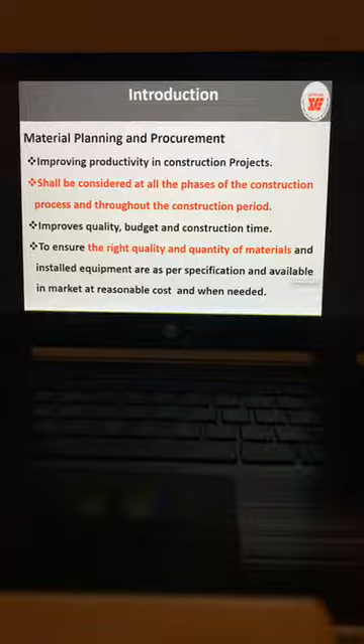Choosing the right material, right brand will help enhance quality and maintain the budget and construction time, and ensure the right quality and quantity of materials and installed equipment are as per specification and are available in the market at reasonable cost and when needed. Most of the time we keep getting requests from contractors that a particular material brand specified in the contract is not available.

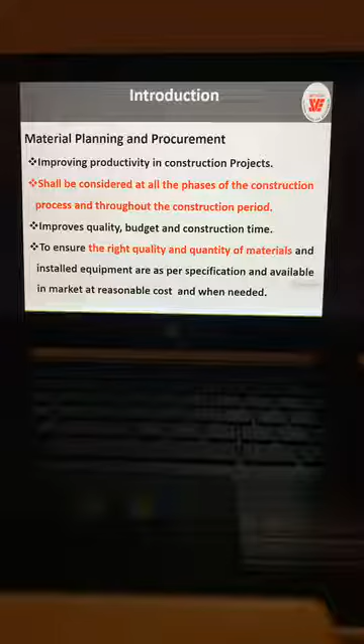So the process now, we are going to the next topic, that is the material planning and procurement process, starting from planning. What is the planning of material? Like when we do the drawing itself, they'll give the specifications for the material, and then we have to do the quantity survey.

Identification of the materials' availability, procuring those materials and storing at the site, receiving and distribution at the site from the stores. So we issue the materials for construction. This is the process.

Material planning and procurement is to have the right quality of material, right quantity - what is the amount of material required - and at what time you require each material. We have to plan.

So it's very important, time. That means suppose we were planning for one of the clients that he wanted the facility to be ready by end May, suppose, or end June.

So what is the delivery period for finishing transformer, what is the delivery period for generator, what is the delivery period for elevators, what is the delivery period for air conditioning chillers.

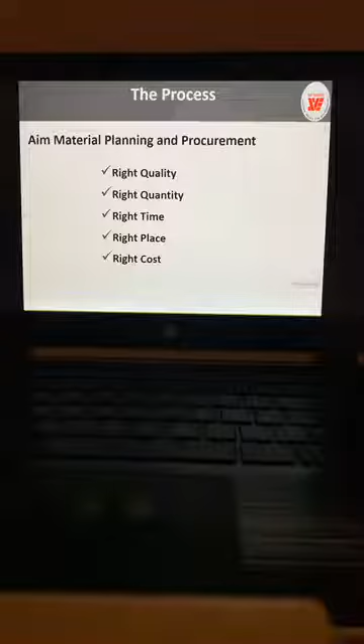And at right cost. So this is the objective of material planning and procurement: quality, quantity, time, place, cost.

Next is the objectives and functions of material management. So we have to manage these materials - procurement, cost and time. Efficient material planning, buying or making. Suppose sometimes bricks, let us say, we make at the site.

Concrete we make at the site, or you may procure by ready mix concrete. Which is better? Procuring and receiving, placing order and receiving time, storing and inventory control, and supply and distribution of materials.

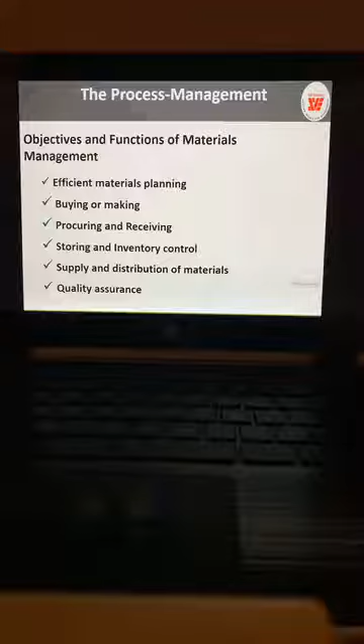And quality assurance. This is the most important process.

Next is the process of material management. It starts from material planning, purchase, stores, inventory, receiving and inspection - that is MIR, material inspection reports - and value analysis.

And standardize and variety reduction. That means we should try to minimize the number of items at the site, that is inventory management. Materials handling and traffic variety - that means how do you take the material to the site.

And then the disposal of scrap and surplus, or material preservation for any future requirements. So these are the points that the material process, procurement process will follow.

Next is the material planning. The estimation, that means the quantity survey. Nowadays it has become much easier with the technology.

Like if you use Revit, you will get all the material quantities required. And then once you have the quantities, once you identify the vendor, you go through the vendor procurement process. Then you have to go for ordering, and then scheduling of the material.

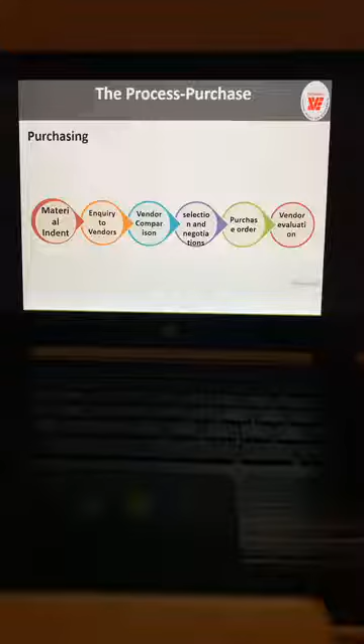Inventory control department decides about the type of ordering system. That means when to order, what payment terms you should have, fixing the safety stock limits - that is also inventory responsibility. How much stores capacity you have, and what is the consumption at the site, and how we'll use it.

And fixing up the reorder level. That means at what period - cement, suppose you want to order every day 50 tons, every day 100 tons. What is the requirement, and what is the storage capacity you have, and then fixing up the maximum minimum stock level.

At the site, the minimum required is at least 2-3 days consumption. So you have the material consumption depending on the Microsoft Project schedule that we prepare, or Primavera project schedule we prepare, and we have the material requirement plan.

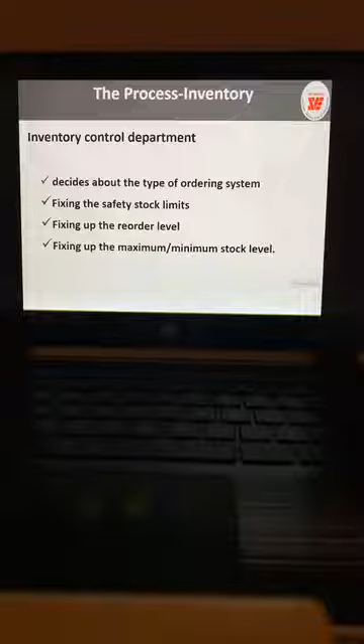And based on that material requirement plan, based on the availability of the material, based on the delivery time of the material, we should plan the ordering process. Next, receiving, inspection and dispatching.

This is basically the received materials when delivered by the supplier. We have to check the quantity, whether the quantity ordered has arrived or not. Sometimes for steel we go by weigh bridge and do reconciliation by taking the number of bundles and length of each bar.

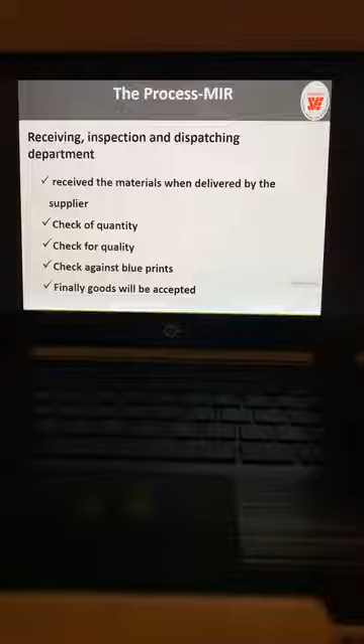We do random checks, check the unit weight of steel, and reconcile with the weigh bridge weight. This is very important, considering the rolling margins also. We check for quality testing and check against blueprints, that is the procurement plan given, and finally goods are accepted. This is the MIR, material inspection and receipt.

Then value analysis and standardization. To reduce the material cost, we have to do value analysis, and optimize the material cost by verifying with other vendors. In fact, I'll give you one example.

I asked my team to freeze the rate, because every day there is variation in cost. So they froze the rate of sand, for example fine aggregate, at a certain price and kept paying the same price. The vendor is happy because he is getting that rate. When I checked with another colleague, they were procuring at a much lower price. I asked my team why, and they said they were following my instruction to fix the price. So fixing the price is important, but at the same time we should not keep paying a higher price. It's very important to manage procurement well.

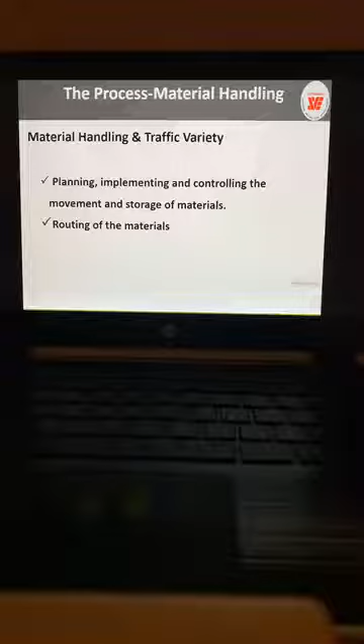Next is material handling and traffic management: planning, implementing and controlling the movement and storage of materials, and routing of materials. That means where we locate the stores and how we shift material from the stores to the activity site. This is also very important, along with disposal of scrap, surplus, and material preservation.

Then problems of material management. What are the issues we face? Organization structure and procurement problems, storage space, security problems, pilferage. This is the biggest thing. I have yet to see any project without pilferage of materials at the site. Even with the best of contractors, we see pilferage happening from the stores.

So this is the biggest challenge in material procurement, along with availability of materials in the market. We should keep checking materials availability in the market due to demand and supply, and due to other projects also.

I am seeing clearly on my phone. I am really worried why people are not able to get video, maybe because of a network issue. Can anybody confirm if you are getting good quality video, that when I present my screen you are able to see? Some people are complaining the video is poor. That means some people are not getting good signal. Video is the second priority in any network, so if you're not getting good video, you have a network problem; many people are getting video clarity fine. So please don't keep writing that. Check your network signal, please. I am getting disturbed because if somebody says he's not getting it, I think probably it is my fault, but on my phone I am able to see clearly. Thank you, Mandlik Garu.

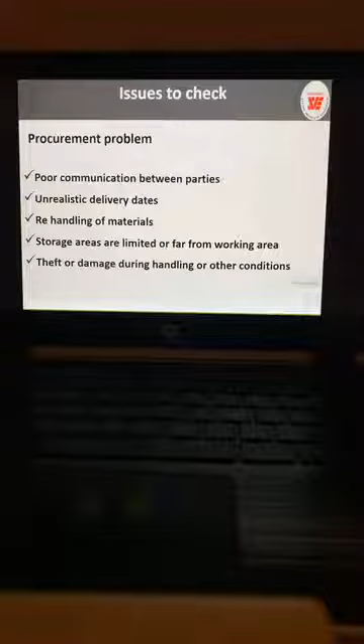Rehandling of materials is a big problem - storage areas are limited or far from the working area, leading to theft or damage during handling. So the handling method has to be managed properly, and we have to design the handling method also for the material.

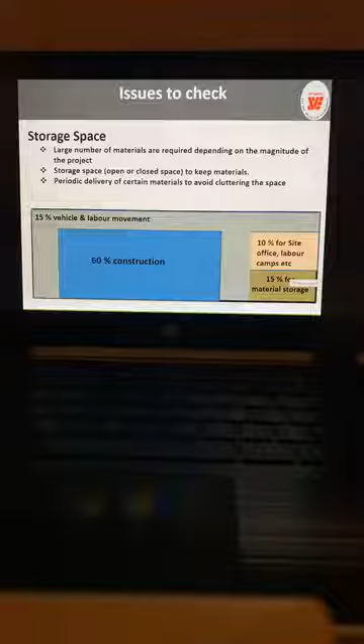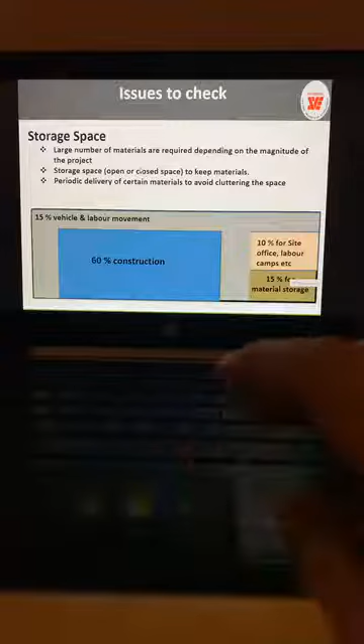So this is a typical site. In any site, normally you will have 60% construction space. We have to plan the site office and labor camps, and then plan the storage of materials. The storage space required depends on the large number of materials and the magnitude of the project, and the storage space is needed to keep material for periodic delivery.

Security problem: loss of material through pilferage and theft is a loss to the project as a whole. Security of materials on site is particularly important for high value items like copper wires - mainly theft happens for copper wire. So you have to keep RFID properly for the materials so that you don't lose them.

Now let us look at the materials we use at the site. For fine aggregate, we have fine sand, coarse sand, and stone crushed sand. These are the types of sand. We should be able to decide which type of sand we use for the project for each application.

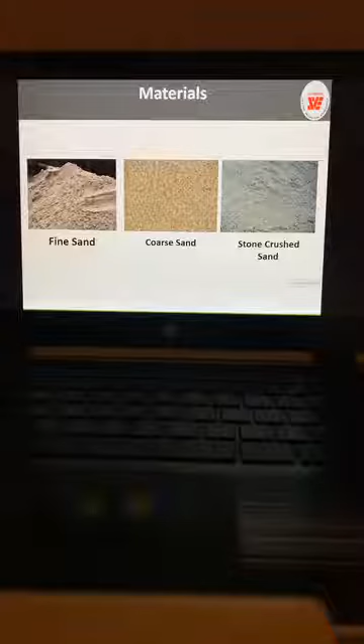Then for coarse aggregates like 40 mm aggregate, hand crushed stone or machine crushed stone, and then 20 mm machine crushed stone, and then 10 mm or 12 mm downgraded aggregate.

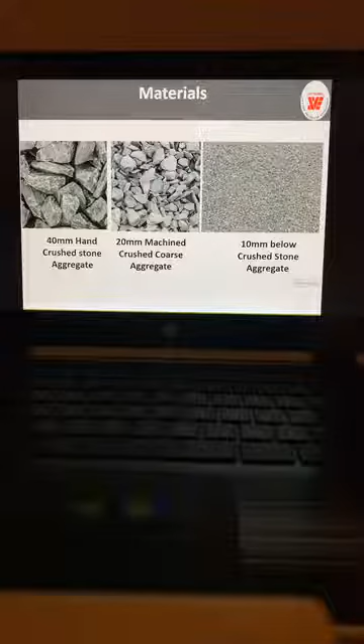Next is blocks or bricks. We have burnt clay bricks, Fal-G bricks, Porotherm bricks, cement concrete blocks, AAC blocks, and laterite blocks - mostly used in Bidar in Karnataka - and hollow cement blocks. So these are the different types of blocks, and we have to decide which block we are going to use for the construction.

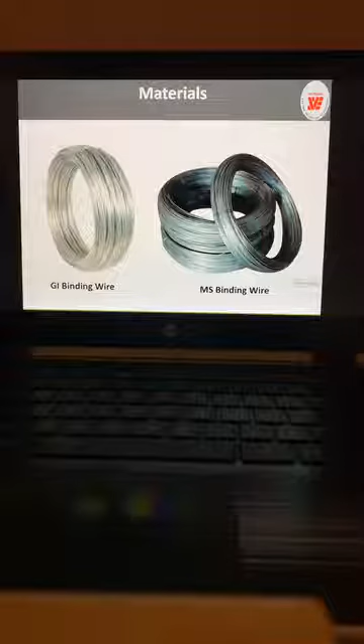And coarse rubble stone, random rubble stone required for RR masonry and CRS masonry, and steel reinforcement - TMT bars or HYSD bars we have to decide. Then binding wire, GI binding wire or MS binding wire. And then cinder for filling sunken slabs or any lightweight filling, we use cinder.

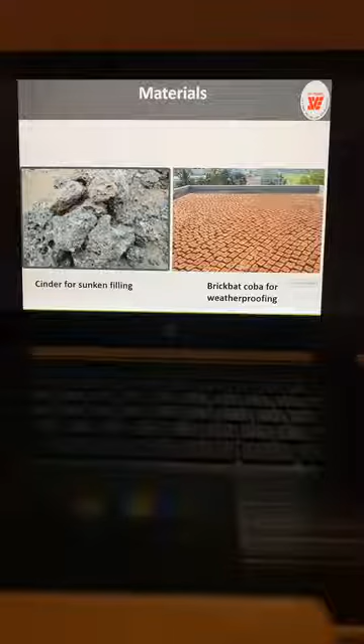And this is brickbat coba, which is brickbat used for weatherproofing, as we have been discussing. Then doors - we have teakwood panel doors, masonite panel doors, and flush doors. You can see the side frame, and we have the radiata pine fillings, meaning we use this filling material.

These are called sectional doors, and then we have core veneer and fine face veneer for the final finish in the flush door - it can be veneer, Decolam, or normal ply. And then we have PVC doors which we use for toilets and such.

And windows - we have mild steel windows, aluminum windows, aluminum anodized powder coated. People think that aluminum doesn't corrode, but we have to specify anodizing of aluminum and use powder coating. Powder coating provides protection - anodizing alone will not give you protection to the windows. So we have to have powder coated, anodized aluminum windows.

And we have UPVC - I'm not mentioning all types, just the mostly used ones. We also use wooden paneled windows, wooden glazed windows - openable, sliding, sliding with mesh, sliding with 3 tracks, sliding with 2.5 tracks. Like that, we have to specify the windows.

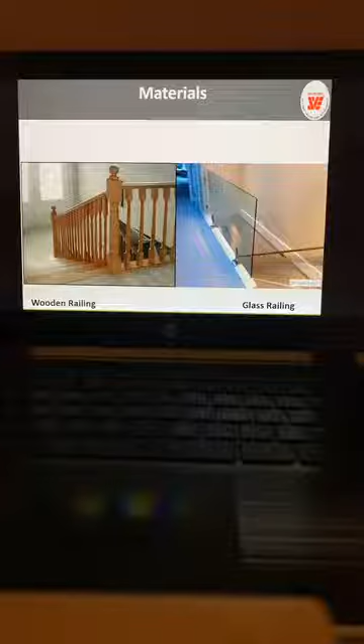Next is flooring tiles - vitrified tiles, non-skid ceramic tiles for bathrooms and flooring, and glazed ceramic tiles. I am showing some examples of these materials.

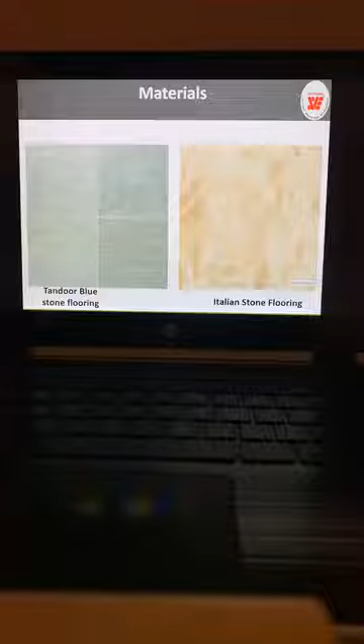And we have Tandoor blue stone. In fact, Tandoor blue stone and Bethamcherla are better than marble in terms of acid alkali resistance. So we should use them depending on the requirement, like for kitchens or bathrooms. We should not use marble there because of its highly acidic and alkaline nature exposure.

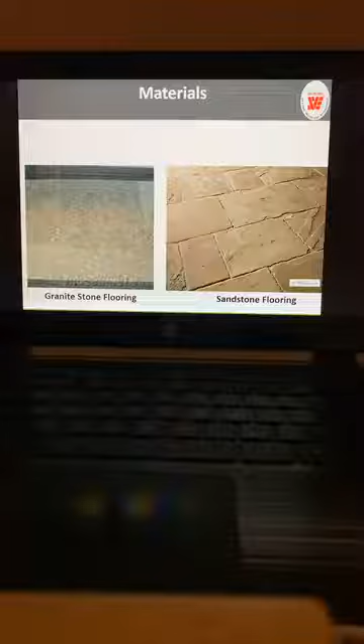And then we have Italian marble flooring, granite stone flooring, granite reconstituted like contra - so many types of materials - and sandstone flooring.

If you take flooring alone, there can be 100 different varieties. So we have to decide, and sandstone means Kota kind of materials. And then we have these lever locks for the doors.

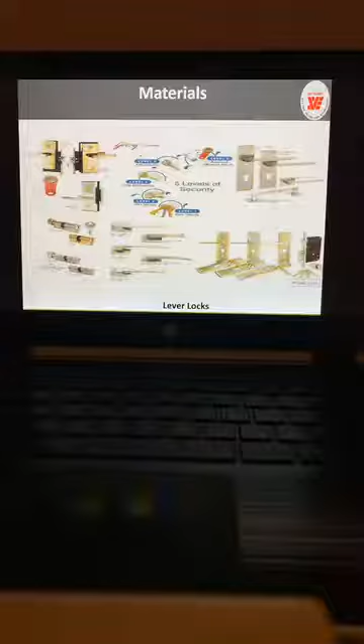I have estimated once for one door, the specification goes into door fixtures, 20 items will go. Like we have the locks, we have the aldrops, we have the handles, all that we have to specify in our specification for the doors.

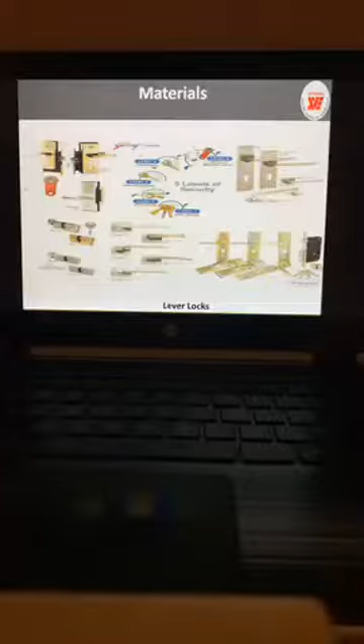Next is the door hardware, that means hinges, how many hinges we have to use and what type of material for the hinge. Is it stainless steel? Is it aluminum? Is it brass? Like that. We have to specify the material for each one of this.

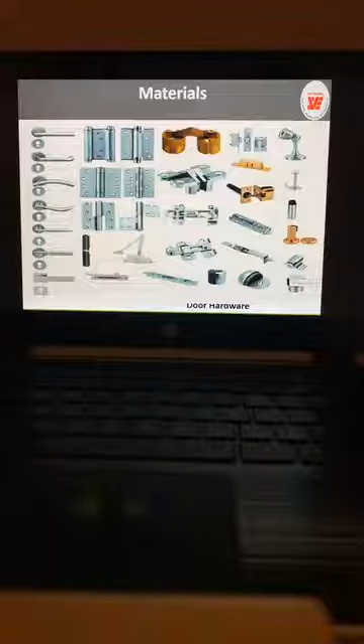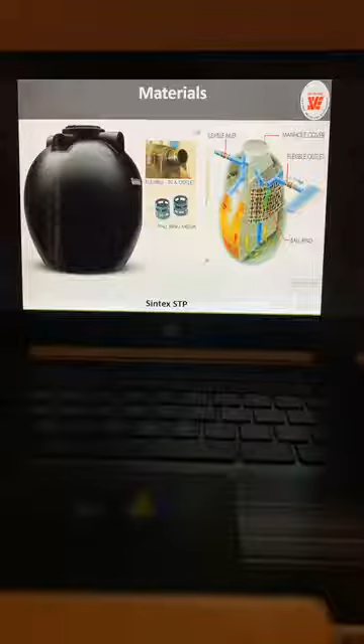Next is the storage tanks. We have the overhead tanks, we have the underground tanks nowadays, we have manholes also nowadays which are available in Sintex. And we have these STP, sewage treatment plants or septic tanks kind of things we can use, readily available material.

And next is the construction chemicals, also the materials. What are all the types of chemicals we use? In one project, construction chemical budget was alone 60 lakhs. That means today's cost, it is almost like 3 crores today. In one project, which is costing about 20 crores, 3 crores we spent on chemicals. So this is the kind of costing.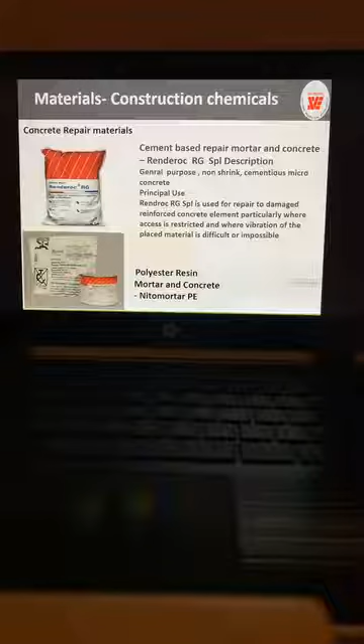So we use cement repair materials like repair mortars and micro concrete and a non-shrink cementitious micro concrete also we use, and we use concrete repair materials, cement-based repair mortar and cement-based repair mortars.

We use the concrete admixtures for plasticizers, admixture for retarder, and so for the concrete and plasticizing materials. And nowadays we are using for self-compacting or flow mix of the concrete. And the concrete adhesives, that is bonding agents with the concrete, and so many types of bonding agents are available. We should be aware of this.

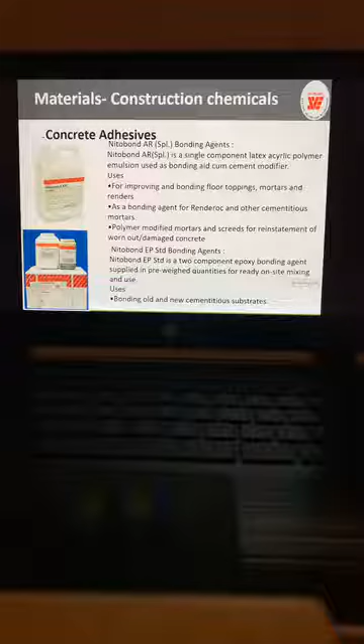I'm sorry if I'm using specific product names, because I'm used to them. I've written those things. And sealants, polysulfide sealants for expansion joint.

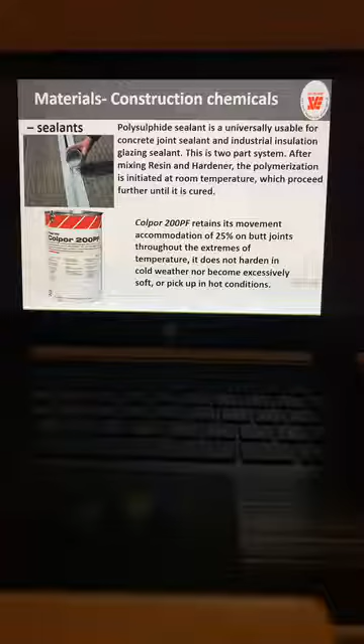For polysulfide sealant, it's very important to maintain the alignment and the gap, uniform gap between the edges. So this is very important to prepare the alignment perfectly. Then only you use the sealant, because sealant, or any polymer, is very sensitive to dimensional tolerance actually. So we have to be very careful in specifying application of the sealant.

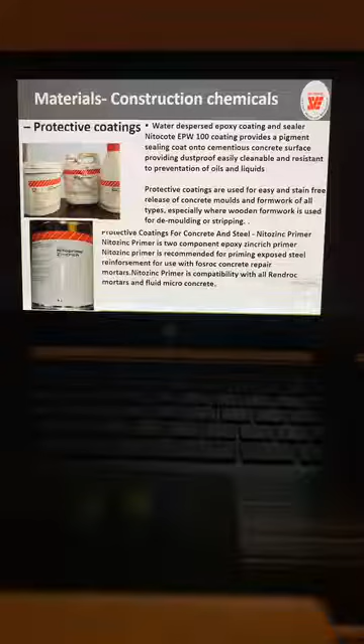Next is the protective coatings. This we have been discussing for corrosion, anti-corrosion, and concrete also when it is exposed to corrosive weathers. And then waterproofing materials, which type of waterproofing we use. Yesterday we talked in detail.

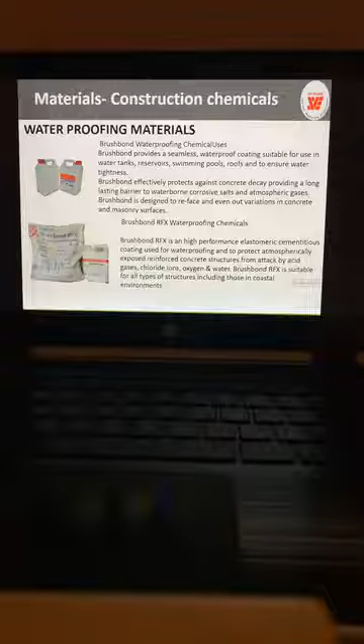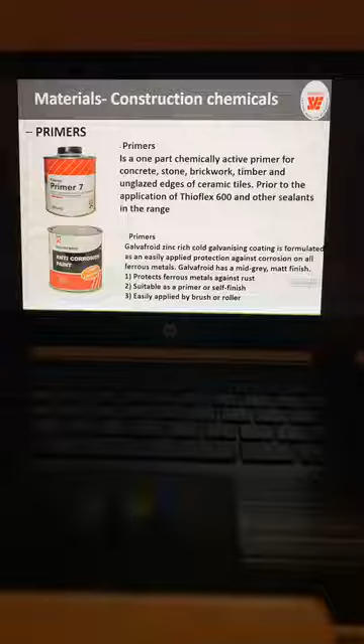And then is the water stoppers. We talked yesterday also, again, water stoppers. And then primers used for anti-corrosion, Galvafroid, zinc-rich cold galvanizing coating is used whenever we do the welding for galvanized materials. And chemically active primers for concrete, stone, brickwork, timber, and unglazed edges of ceramic tiles. All that we can use these primers.

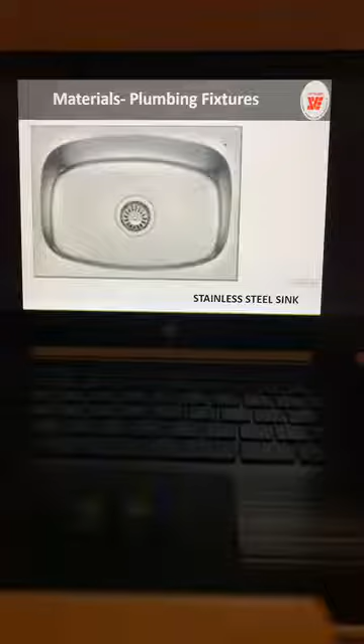And then pipe fittings. This is one of the most ignored subjects. I have come across tenders that specify the number of bends and fittings, because the drawing should go to that level. If you use Revit software, you'll get the number of bends, reducers, couplers, flanges, thread caps, male T-joints, male elbows, female loose joints, male T-joints, all types of materials required.

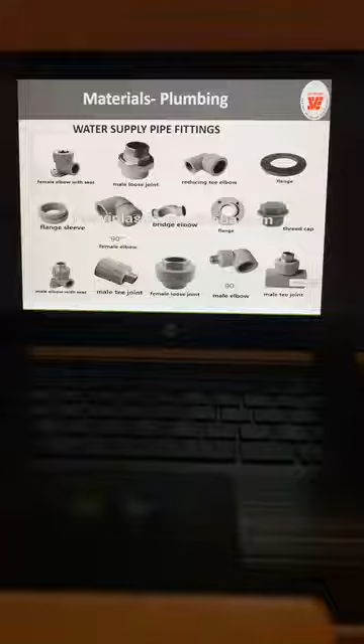We should be aware of what all we have to use in plumbing, because plumbing is mostly done by civil engineers also.

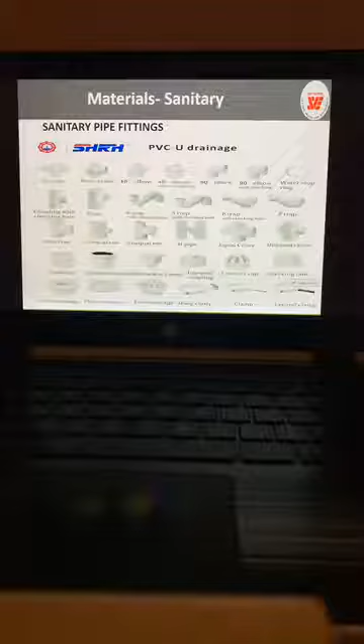And water supply fittings - couplings, female T, and different plumbing materials. Then we have sanitary pipe fittings. We use PVC or sanitary stoneware pipes, SWG pipes nowadays. And the things like couplings, equalities, unequalities, H pipes, expansion joints, rainwater funnels, unequal couplings, checking holes, clamps and expand clamps.

Valves are another thing. We have to control the water supply at certain points, so we use valves - butterfly valves, globe valves, gate valves, check valves, so many types of valves, mainly control valves. And nowadays we have automatic metering systems, Wi-Fi connected metering systems.

Next is electrical materials. You may think, what do civil engineers have to do with electrical and plumbing? Because we are the people who do the costing, and we are the people who monitor installation of all these things. So we should know the terminology, the material, and where to use which material.

This is very important. We have switchboards, mosaic wiring devices, and other wiring devices, and sockets. We have different types of sockets - telephone sockets, internet sockets, and MCCBs, main control switchboards. Next is switches - different types of switches we have, and relays.

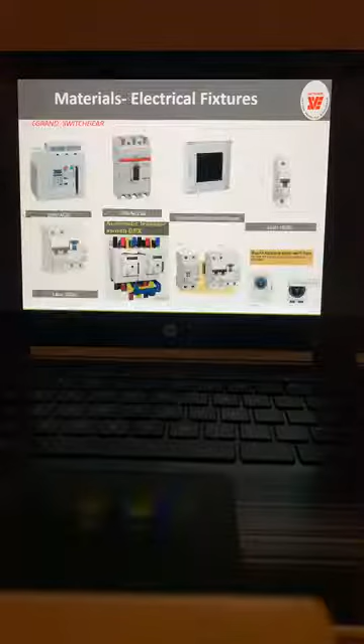And this is another company's switches. Schneider - I can definitely make that statement, I have done a detailed check - Schneider brand switches have better contacts and better relays. And next is Legrand switch gears, and Schneider switch gears, different.

We should know what all we use, where - isolators we should know, phase changers we should know, and we should install them. Some clients say there is no electrical consultant, that the electrical contractor will do the job, but the civil engineer is expected to supervise that. So if you're not aware of these basics, you should insist on basic safety controls in the electrical work.

Next is the UPS that is installed in most works. We should know UPS brands too, and DG sets, and then electrical cables - commercial armored cables, normal cables for residential use, buried armored cables. We should be aware of these things.

Next is light fittings - so many fittings are there. In light fittings itself we have 100, 200 varieties. So which fitting are we going to use? Commercial lighting, office lighting, industrial lighting, hazardous lighting, landscape lighting, area lighting, solar lighting, clean room lighting.

You know what solar lighting is? It's solar tubes - you can get solar tubes directly into the house, and each solar tube costs about 7,500 depending on the length. In daytime you can use solar tubes if you have large areas to cover. In industries also solar lighting is used. Clean room lighting fixtures are different, and roadway lighting is different.

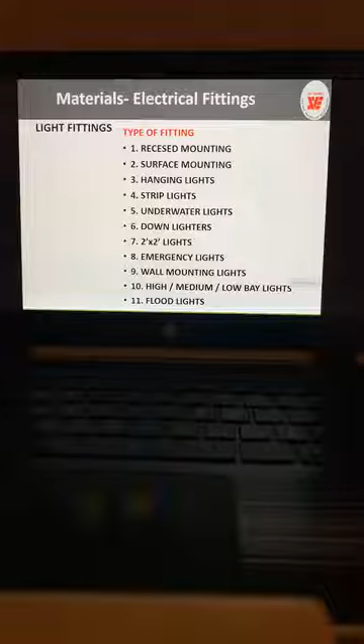Hanging lights, strip lights, underwater lights, downlights. Underwater lights we use mainly in swimming pools, and downlighters, 2 feet by 2 feet lighting fixtures mainly used in offices in false ceilings, emergency lights, wall mounting lights, high, medium, low bay lights, and floodlights. So many types of light fittings are there. Let us see these light fittings and different companies that supply them.

I'll not go into detail, but we should be aware of each light fitting and its terminology, because we have to make estimates correctly and float tenders with the specifications correctly.

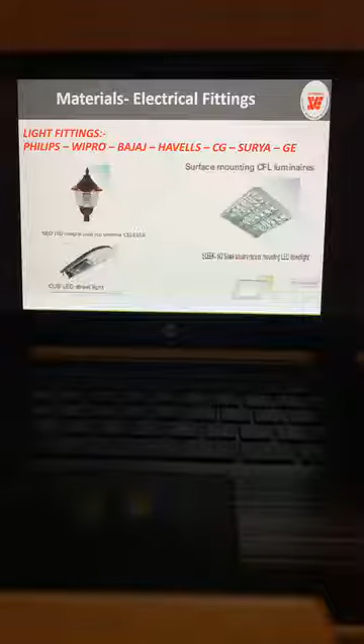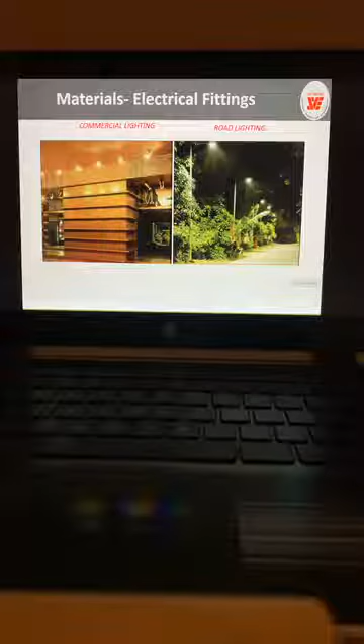Next, light fittings. You can see these different types of light fitting: surface mounting, office lighting, and the types of fixtures we use. Industrial lighting, commercial lighting in hotels and malls, and street lights. These are the different types of lights we use.

Then we have clean room lighting, which means there should not be any dust collection. And industrial strip lighting for uniform lighting, landscape lighting, and shed lighting.

This is designed by the electrical people, but has to be implemented by us project managers or project engineers. So they should have the basic knowledge of all these things.

And switch gears, indoor type, outdoor type, transformers indoor type, outdoor type. We have oil filled transformers, dry type transformers, distribution transformers and power transformers. We should know these, how they look and how we mount them, because I suffered as a young engineer without knowing these things. I used to design. So it's very important for us to know about these items.

Vacuum circuit breakers, compact substations. Substation means we always see the substations that are outdoor. So we have indoor substations also, and we have indoor compact substations also.

And then automation, home automation. Nowadays we have burglar alarms, security and surveillance cameras and all. It's a big thing nowadays, and it is going to be even bigger in the future. So we need complete automation: lighting control, air conditioning control, heating control, all that are available now. We have to know about these automation facilities and systems available.

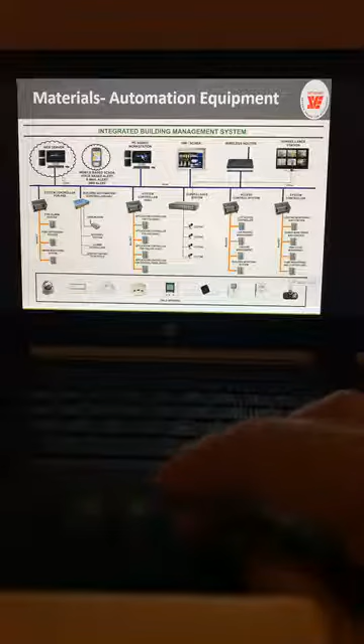Integrated building management system. This is a typical circuit where we have air conditioning control, building automation control, lighting control, access control, surveillance control, and the system controller. All are connected by wireless router and web server, PC based workstations, and SCADA also.

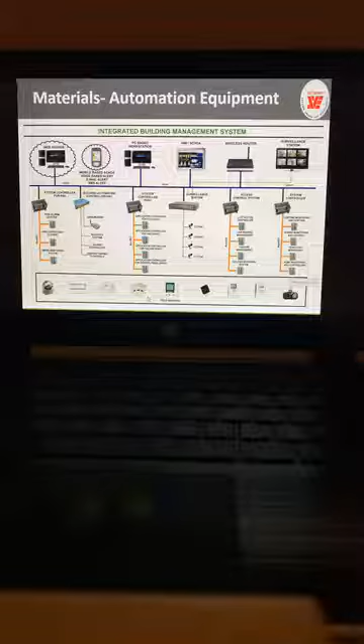So in building automation, even the fire safety, like fire detection, fire alarm, fire sprinklers and all, they are all controlled by automation systems. And we have communication, and we have different solar panels and installation.

And we have the lightning protection for all important buildings. Lightning protection and earthing has to be planned properly. Earthing is an important thing.

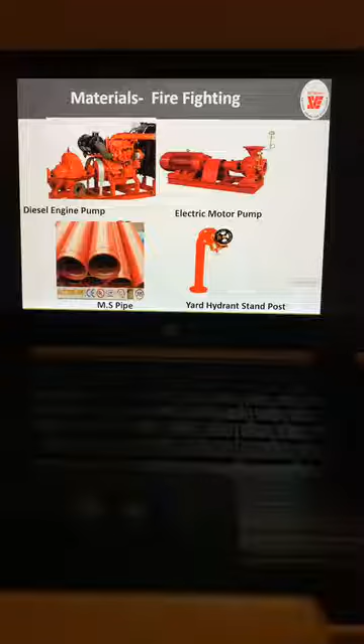And then firefighting. We have the pumps for firefighting. You must know that any firefighting system will have a minimum of 3 pumps: electrical pump, backup pump, and diesel pump or jockey pump. And then we have MS pipes and yard hydrant stand posts.

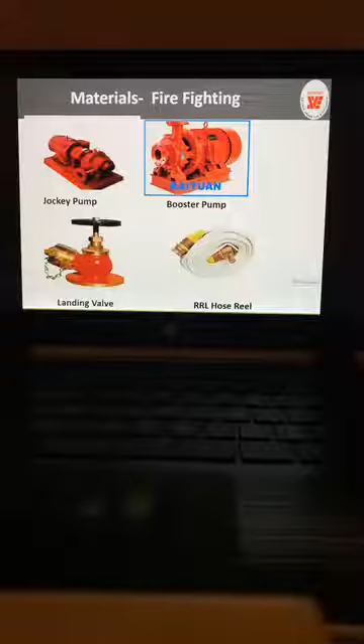This is the jockey pump, and we have the booster pump, and we have the hose reel, and we have landing valves. These are all the items that we use in firefighting. I have also mentioned hydrant valves, fire alarm, hose reel, mask and gloves that are required, and safety shoes. These are all things we have to provide for firefighting.

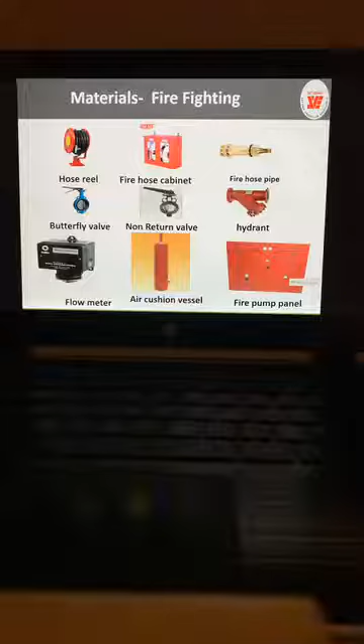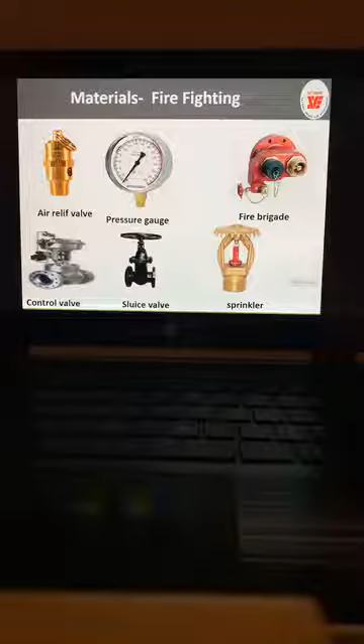Sprinklers and fire buckets, all this. This is a hose reel, fire hose cabinet, fire hose pipe, hydrant pipes, non-return valves, butterfly valves, flow meters, air cushion vessel, and fire pump panel. These are all items we come across. Air relief valve, pressure gauge, fire brigade connection, sprinkler, sluice valve, and control valve.

For fire alarm equipment, we have this alarm and CO detector, shown here. These are the detectors and the infrared system for early fire detection, basically smoke detectors. And we have high resolution CCD digital cameras. This is the fire alarm detector, a simple detector, and then smoke detector, fire detection, infrared thermal imaging, and security cameras.

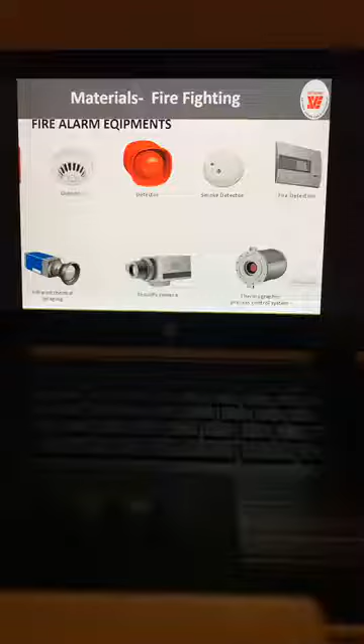Many types are available, and we should specify depending on the need. Of course, the fire consultant will do that, but we should know what all is possible. Then this is the bell, and we have the beacon lights for smoke conditions, loudspeakers, extinguishers, and fire buckets. These are all the items.

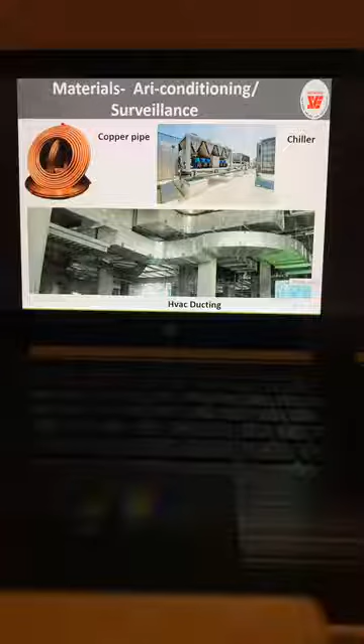Next is air conditioning. We also do implementation of air conditioning and CCTV. So copper pipes, fan coil units, chillers, ducting for air conditioning, AHU fans, HVAC air conditioning grills, and fire pumps.

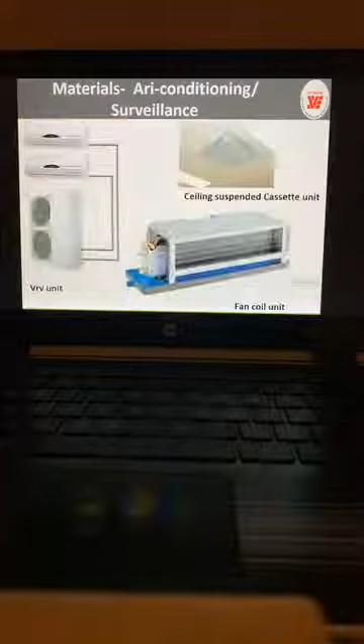A ceiling suspended cassette unit, fan coil units or FCUs, and the VRV units we use nowadays. Air handling units, normally installed on the terrace, chillers, duct insulation material, and dampers.

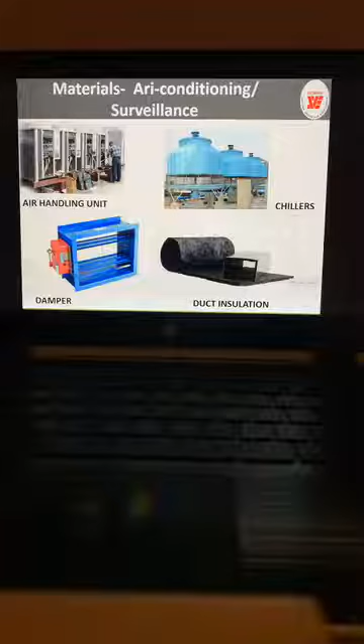The air handling units and air conditioning insulation, different insulation materials for the ducts. The objective of this talk is not the design, but to expose you to different materials, how many types of materials we come across in a construction.

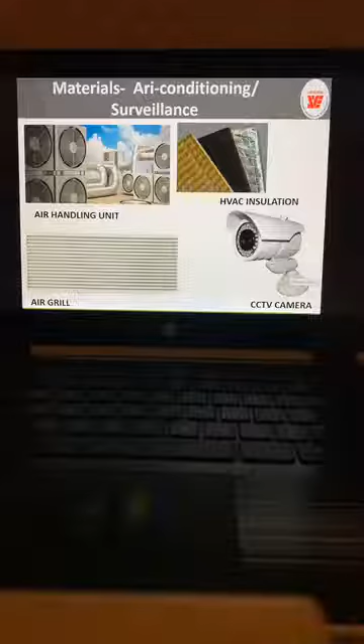My typical estimate is 2,000 items we have to handle in a typical construction site. So I am showing all the items that are required. You will see air grills for the ducts, CCTV cameras, cassette units, and dampers. These dampers dispense the air at the given location, and you can adjust them.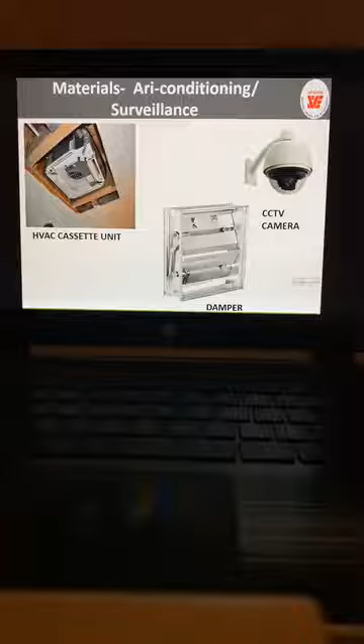Then building services equipment, we have cameras and mechanical fans. We use these mechanical fans in parking areas where we need exhaust or fresh air supply, and also in industries.

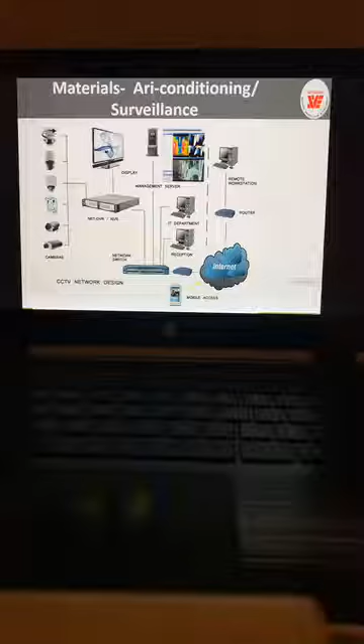Next is surveillance. We have these cameras installed, including zoom cameras. We talked about it, but what are all the items? We have to have the DVR required, and we have these high volume, low speed fans.

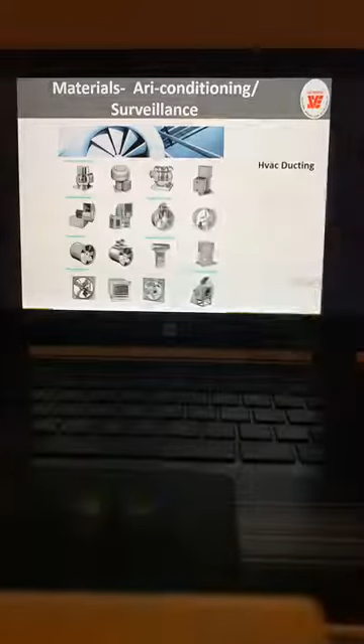We have ducting for HVAC, and we have fans in the ducts also in the HVAC, where the distances are more.

Then mechanical items: we have travelators, elevators, and escalators. Nowadays these escalators and travelators are mostly used in malls. And elevators, of course, are common - capsule type, hydraulic type, and automatic type elevators.

This is the outdoor storage space. Even for fine aggregates, bricks, and blocks, we have to store the material at the site.

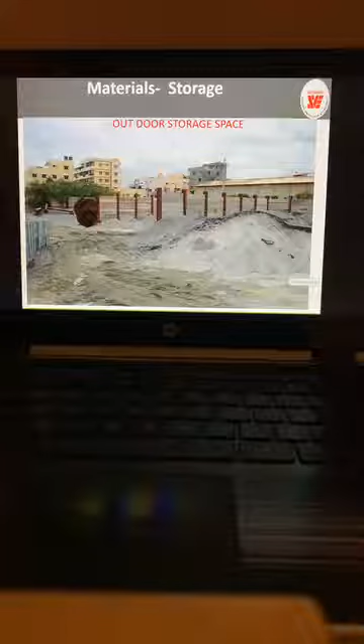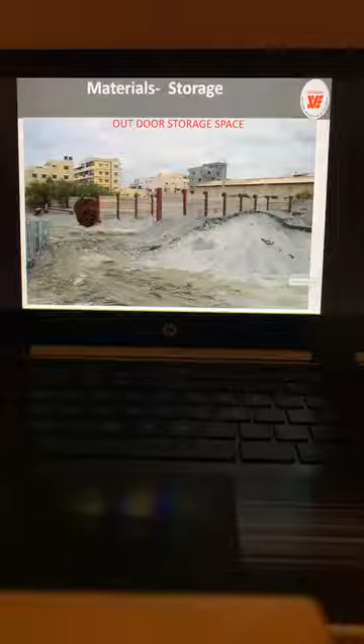Recently, some sand issue was there - the contractor had not collected the sand. In olden days, contractors used to dump the material first at the site for a month's requirement, because sand and aggregates are highly susceptible to price fluctuations. So the better control is to keep the material at the site, whether it is blocks, cement, or steel requirements. We have to plan well ahead and store so that the project timelines are not affected due to risk in procurement of these materials.

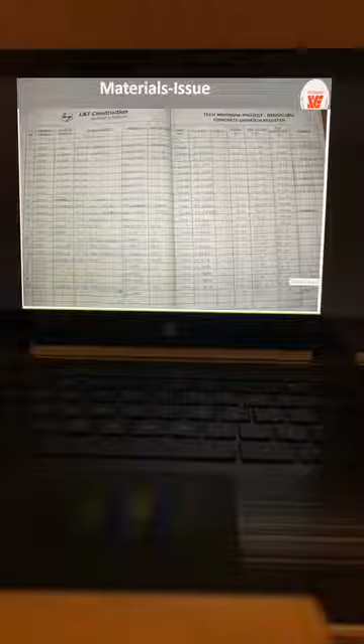You can see the concrete dispatch register, when it is dispatched and at what time. And this is the material issue register. As I mentioned, for any material - whether cement, steel, or chemicals - you have to maintain the cumulative receipt, cumulative consumption, and balance at site in the registers.

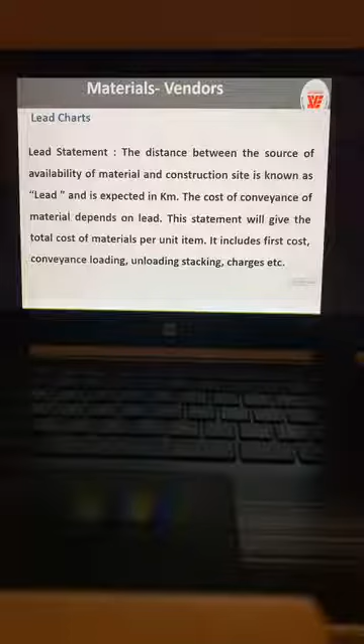If cement also is not available in the nearest place, if we don't have a quotation for supply in Hyderabad, then we take the quotation from wherever it is available, and from there we calculate the lead cost.

Next is vendor management. This includes vendor profile and risk assessment, vendor audits and certification, and non-conformance corrective and preventive actions if any vendor is not conforming with our requirement, along with product sampling and test results, and performance monitoring and reporting. This is a very important aspect of vendor management.

So we need to identify the qualifications of a good supplier, identify appropriate supplier selection techniques, identify potential disadvantages of single sourcing, analyze how to reduce the number of suppliers since we cannot manage too many suppliers, and learn about strategic supplier relationship management.

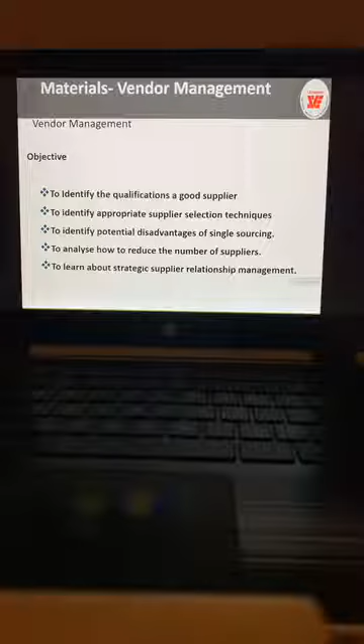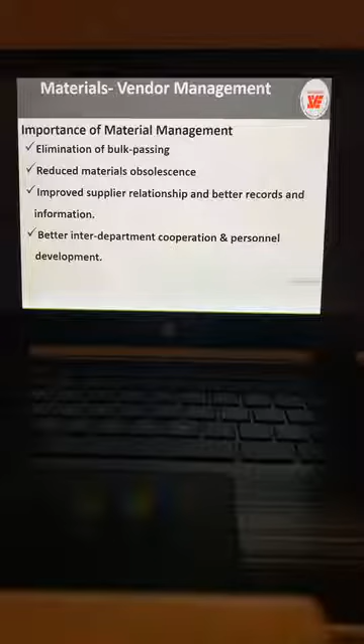Yeah, it can be done, but we have to specify the brands for quality assurance. Importance of material management: lower prices of material, faster inventory, continuity of supply, reduced lead time, reduced transportation cost, and less duplication of efforts. Also elimination of bulk passing, reduced materials obsolescence, improved supplier relationship, better interdepartment coordination, cooperation, and personnel development.

So these are the quotations we normally collect from vendors for different types of products we require. This is just the vendor management technique I am showing - quotations, how the supply, installation, taxes and all are prepared, and then we give the details of their quotation: what size they have given, what specification they have followed.

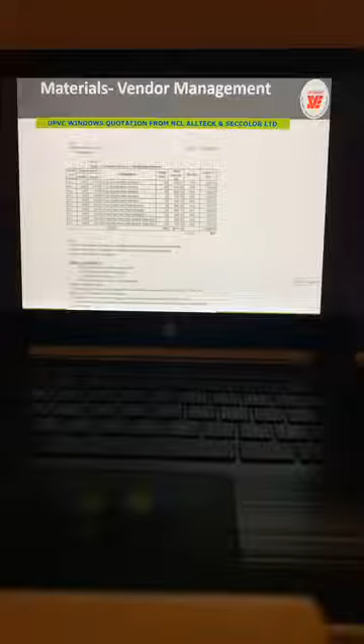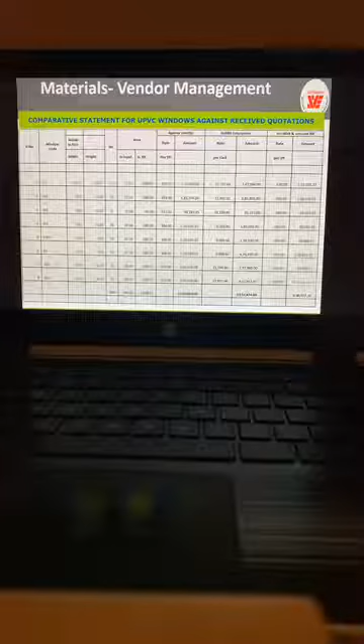Different vendors' quotations we take and compare. We prepare the comparative sheet for each vendor and the final cost, and we finally recommend. Here you can see vendor 1, 2, 3, and what each item costs. There is so much variation, and we have to analyze why that variation is coming - has he understood the spec correctly? Are all giving the same specification? So this is the comparative statement finally, and we give the client a recommendation for which vendor to proceed with.

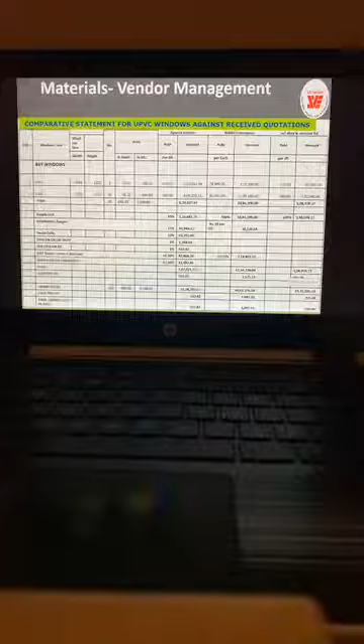Somebody was asking me - in fact I conceived this, Buildnova, in the year 2000. I felt the challenge then itself, but probably I was too early. The objective was to provide facilitation for vendors for planning, design, procurement, and management. Even jobs, services, real estate were there in that portal. Even today you can see that portal, buildnova.com.

So we will plan proper procurement through this kind of portal. Now we have Alibaba, now we have Amazon, so many online portals, but none focused on construction. So there is a good scope for vendor management for construction. We can show materials online - suppose flooring tiles, how they look and what price you can get. This requires everyone to tag on and utilize it, whether it's procurement or vendors or service providers. If they all connect through this portal, automatically you will get the best products at the best price.